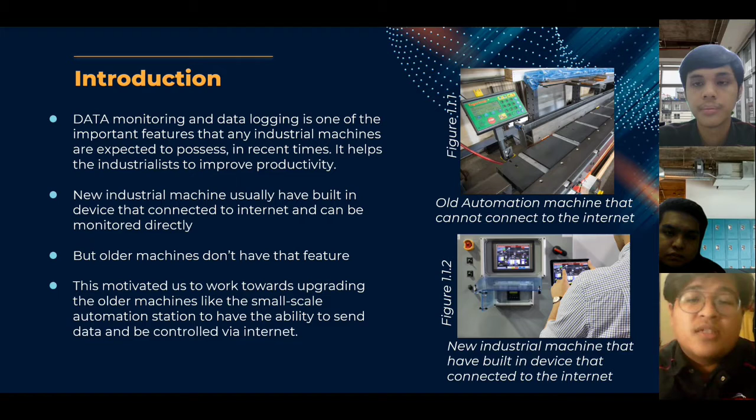Our objective is, first, to take remote monitoring and controlling action. Number 2 is to prepare a user manual. And lastly, number 3, to develop a PLC program to move the system.

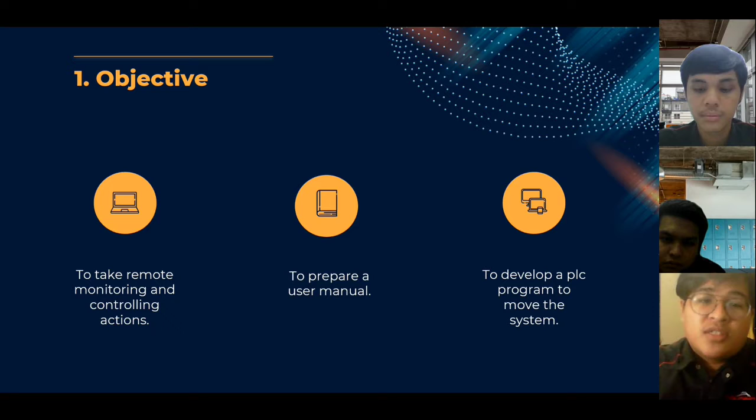The problem statement for our project: the mini-scale automation station has not been in operation for a long time during the PMP session. The machine can still be used and is useful for study material. This machine has not been used for a long time because it was obsolete. Many new machines can be controlled through the use of internet networks. By using IoT, the machine can be upgraded and reused.

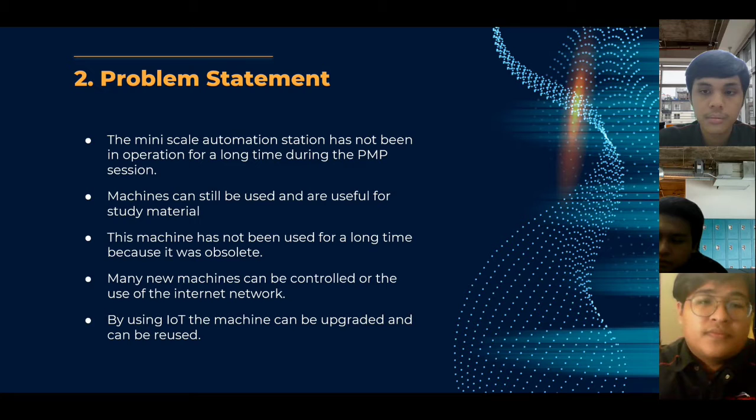The scope of our research: for this experiment, this IoT implementation may help ease the work in the automation industry and extend innovation and invention in the engineering society.

Project statement for our project. The Internet of Things, IoT, has not been around for very long. There have been visions of machines communicating with one another since the early 1800s. By the year 2013, the Internet of Things had evolved into a system using multiple technologies. The traditional field of automation, wireless sensor networks, GPS control systems, and others all support the IoT.

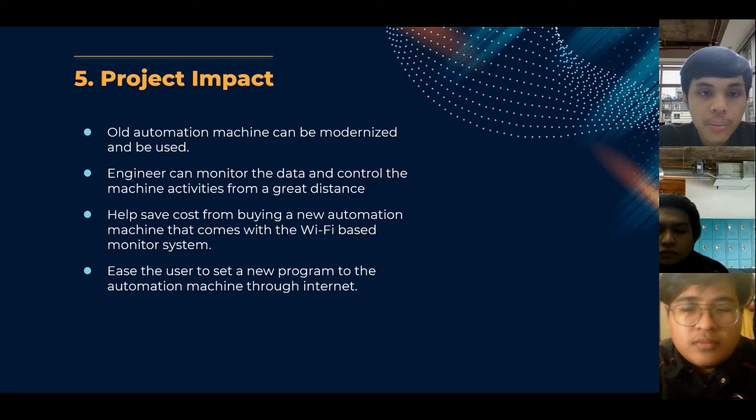Project impact for our project: old automation machines can be modernized and be used. Engineers can monitor the data and control the machine activities from a great distance. This helps save costs from buying a new automation machine that comes with a Wi-Fi based monitor system. It also allows the user to set a new program to the automation machine through the internet.

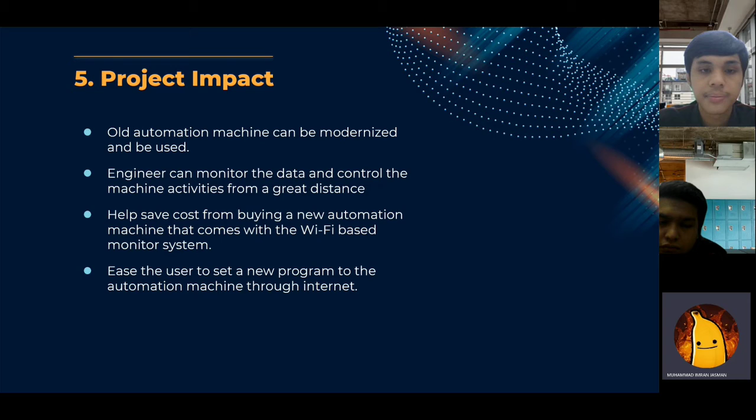So for the next slide is the estimated cost. For our project, we buy 3 components. The first component is the V-box, quantity 1, at a price of 650 ringgit. For the second item, we have micro PLC, quantity 1, at the price of 121 ringgit and 80 cents.

For the third component, we have power supply, quantity 1, at a price of 46 ringgit. Lastly, our total cost is 817 ringgit and 80 cents.

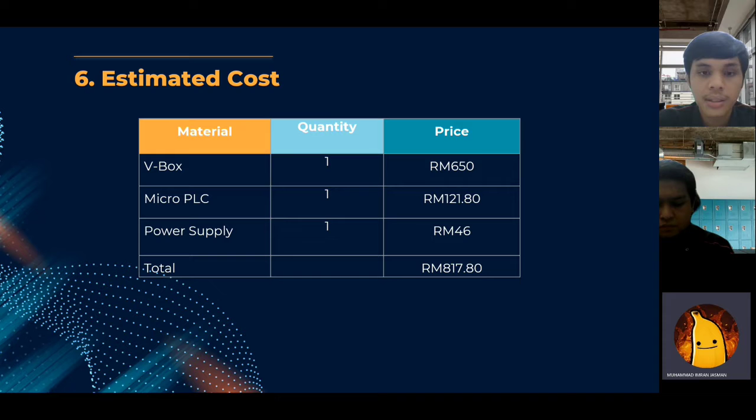Next, the small-scale automation station for our project has 4 parts. The first part is the gripper, which will open and close when picking up the pellets.

The second part is the solenoid, 5/3-way and 5/2-way, which will control all the cylinder airflow by either allowing or preventing airflow through the valve. The third part is the double-acting cylinder, which will go up and down. The last part is the rotary cylinder, which will go left and right.

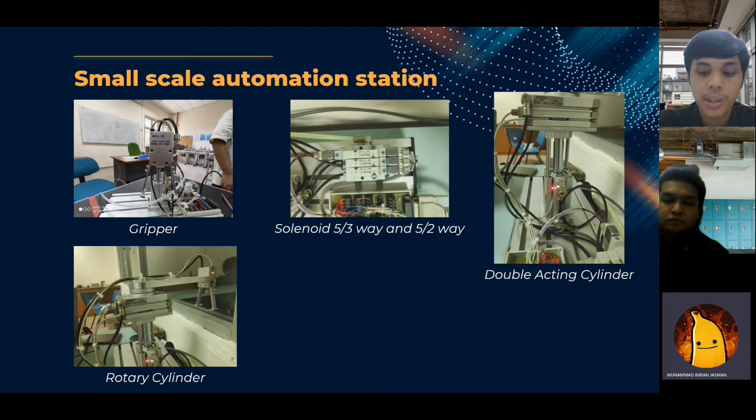Next, materials used for our project. The first material is the air compressor, for the automation system to move. The second material is the micro PLC, which we will be programming for the automation station.

The third material is the power supply, which provides 24 volts. The last material is the WECON V-Box, which is the server that we need for us to connect the small scale automation station to IoT.

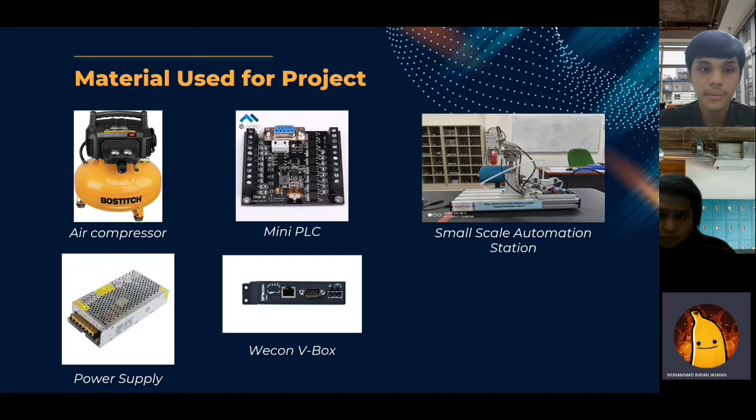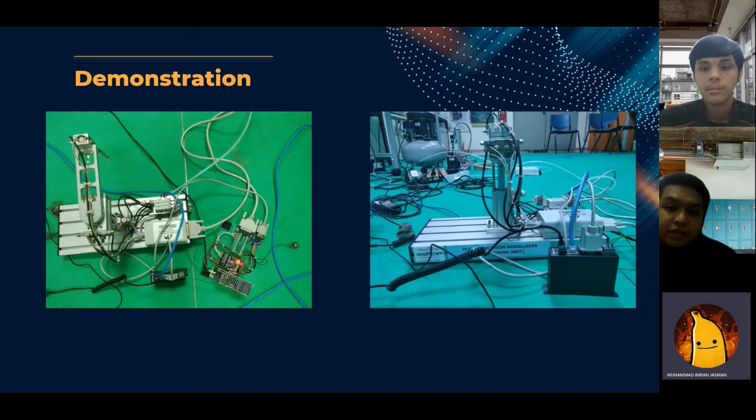This is the angle taken, picture taken from upper angle and the front angle for our small scale automation station. This is when the robotic arm turns left, and the right side of the picture is when the robotic arm turns right.

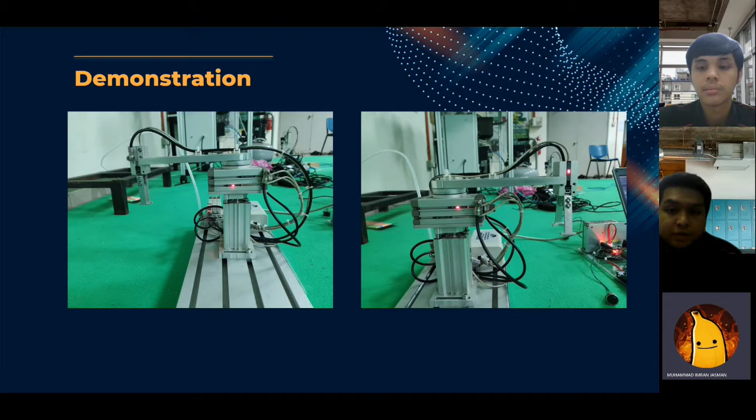The small-scale automation station was connected with Mitsubishi FX1N mini PLC, which we program using Mitsubishi GX Works. The PLC, fitted with an RS232 adapter, was then connected to the VBox, with the VBox connected through a micro USB cable to the laptop. This is to program the PLC.

Using the WECON V-Box application, we insert the needed command for the VBox to send data to the PLC. From here on, we can monitor and control the automation system using the Wecon application available on both laptop and smartphone.

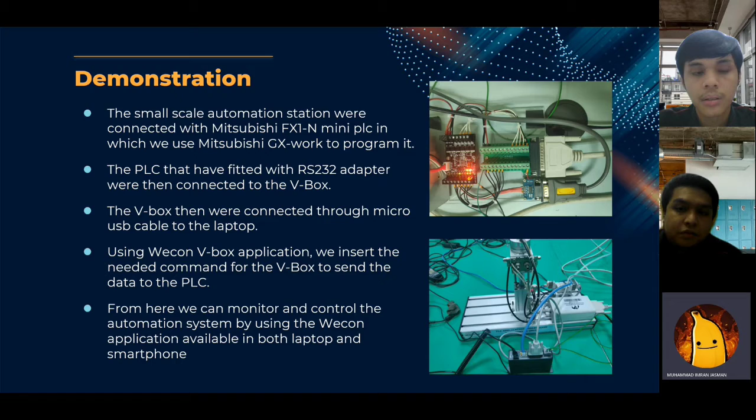This is the movement for our automation station. The first step is the robot turns left and is ready to go down for 5 seconds. The sensor status for this movement is sensor 1 will open, and sensor 5 and 3 will open, while sensor 2 and 4 will close.

The second step is robot down and ready to open gripper for 5 seconds. Sensor 1, 2, 4 will turn off, meanwhile sensor 3 and 5 will open up.

Step 3, the gripper goes down, the gripper closes to pick the pallet for 1 second. Sensor 1, sensor 2 and sensor 4 will close, while only sensor 3 is open.

For step 4, the robot will go up for 3 seconds. Sensor 1, sensor 3 and sensor 5 will open up, while sensor 2 and sensor 4 will close.

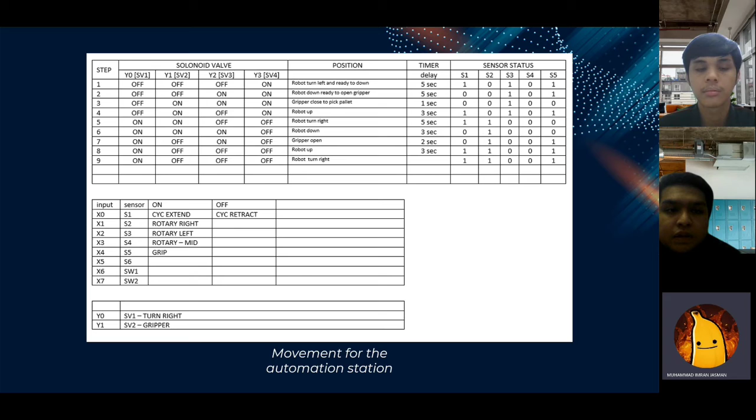The next step is step 5, which the robot will turn right for 5 seconds. Sensor 1 and sensor 2 will open up, while sensor 3, 4 and 5 will be closed.

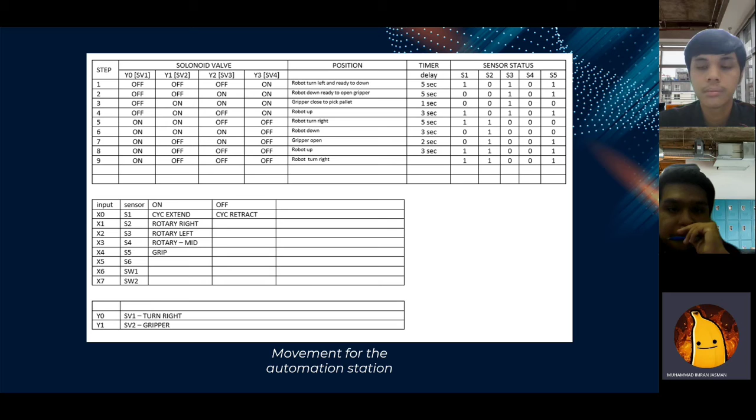The sixth step is the robot will go down for 3 seconds. Sensor 1 will be closed, sensor 2 will be open, sensor 3, 4 and 5 will be closed.

The seventh step is the gripper will open up for 2 seconds. Sensor 1 will be closed, sensor 2 will be open, sensor 3, 4 will be closed, and sensor 5 will be open.

For our 8th step, the robot will go up for 3 seconds. Sensor 1, 2 and 5 will be open, sensor 3 and 4 will close.

In our 9th step, the robot will turn right. Sensor 1, 2, and 5 will open, and sensor 3 and 4 will be closed.

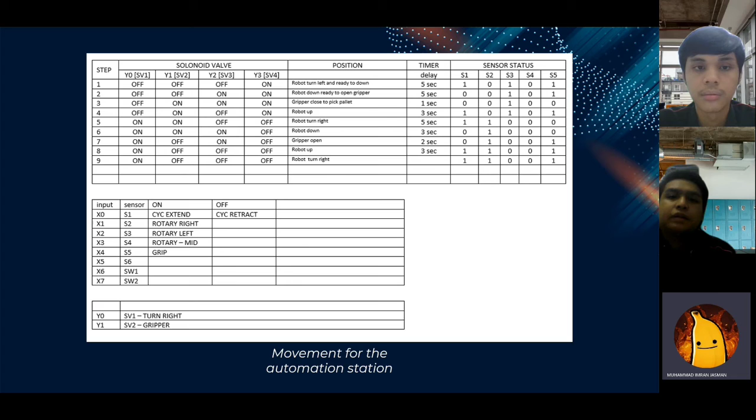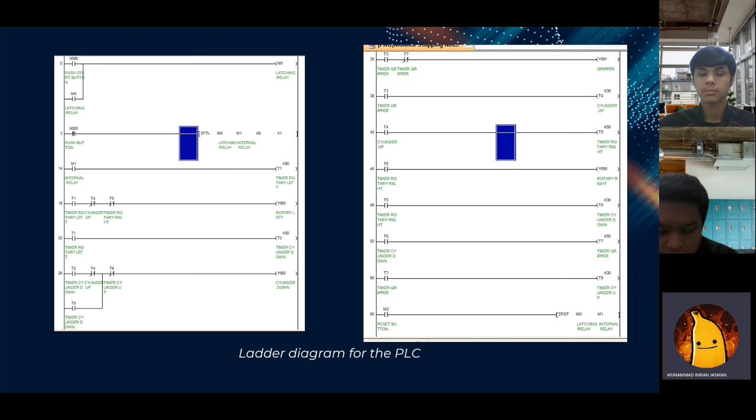The rotary cylinder left will run on a timer to make the cylinder go down. After the cylinder goes down, the gripper will pick the pallet and close up. The next step is the cylinder will go up for 3 seconds, and the next is the cylinder will rotate to the right for 5 seconds.

After that, the timer will start counting for the cylinder to go down and drop the pallet. After that, it will go up and return to its original position. M2 is for the sequence to stop.

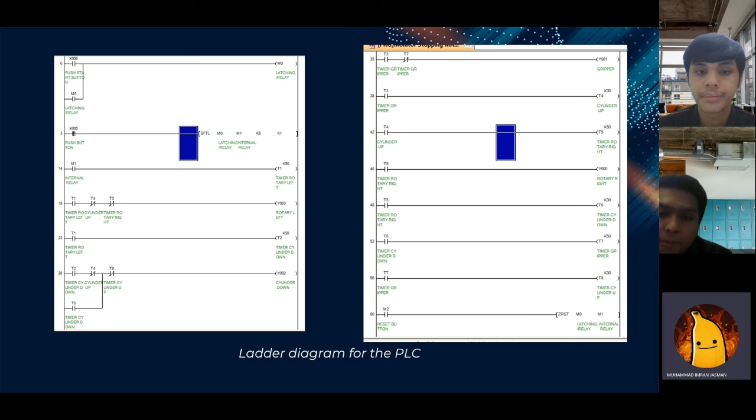Next, this is the command for our V-Box, as you can see.

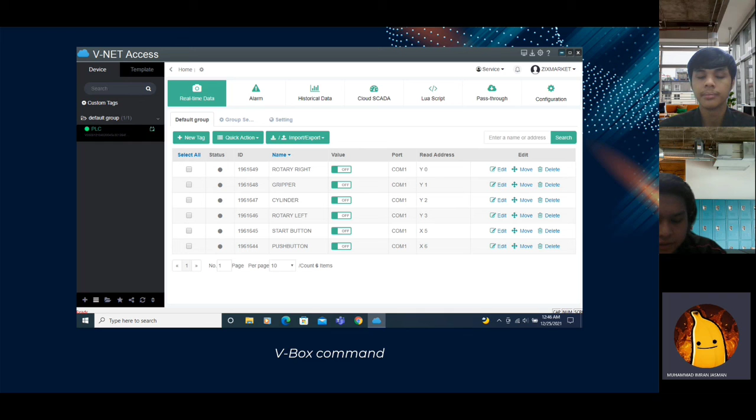We will show our video for our demonstration in the small scale automation PLC.